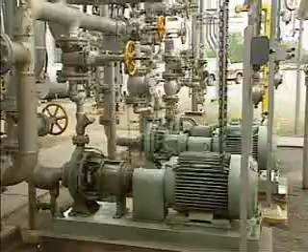Bearings are machine parts in which other parts turn or slide. They are found in almost every type of moving machinery. Since your job involves maintaining equipment that uses bearings, you need to know how bearings operate, how to recognize types of bearing failures, how to remove bearings, and how to install new bearings.

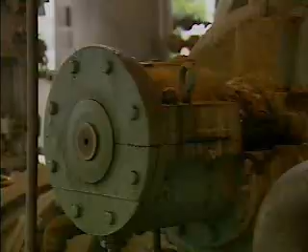The two general categories of bearings are rolling contact bearings and sliding surface bearings. This unit focuses on rolling contact bearings. Bearings are found in almost every type of moving machinery, and they perform three basic functions: carrying a load, reducing friction, and positioning moving machine parts.

The term load refers to the force or weight that is placed on a bearing. Different bearings are designed to withstand different types of loads. The type of load placed on a bearing is determined by the direction in which force is applied. This force can be either axial or radial. Let's look at an illustration to see what these terms mean.

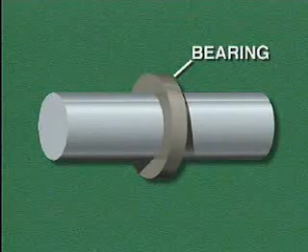Most bearings are mounted on rotating shafts. A shaft rotates around a center line or axis. The distance from the axis to the outside of the shaft is called the radius.

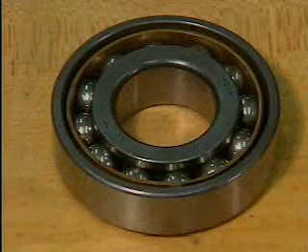While individual bearings may differ slightly, a typical rolling contact bearing consists of rolling elements, an inner ring, an outer ring, and a retainer. The rolling elements are either balls or rollers made of specially hardened steel. In this example, the rolling elements are balls, set between two hardened steel rings, an inner ring and an outer ring. These rings are often called races.

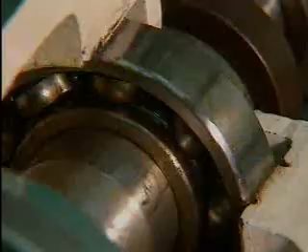In a typical installation, the outer ring is fixed and doesn't move. The inner ring is fitted to the shaft. As the shaft rotates, the inner ring also rotates. The rolling elements are held in position by the retainer, which you may hear referred to as a separator or a cage. The retainer positions the rolling elements evenly around the rings and ensures that the load is distributed equally on each rolling element when the shaft is turning.

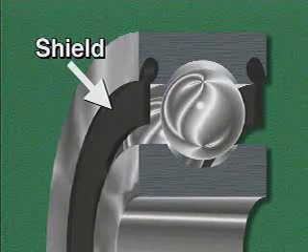In addition to these parts, some rolling contact bearings are equipped with devices that protect them from dirt and other contaminants. One type of protective device is a shield. A shield can prevent all except the very smallest contaminants from entering a bearing. The shield is usually attached to the ring that does not rotate.

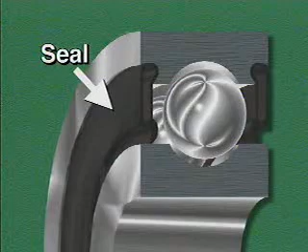Another type of protective device is a seal. A seal is similar to a shield, but it has a lip that rubs against the ring that rotates. Seals are used primarily on permanently lubricated bearings because they prevent the lubricant from leaking out of the bearing.

Rolling contact bearings can be divided into two categories based on the shape of their rolling elements: ball bearings and roller bearings. The various types of ball bearings differ primarily in the shapes of their inner and outer rings. Let's look at some common types of ball bearings.

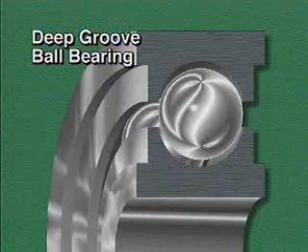A deep groove ball bearing is similar to a shallow groove ball bearing, except that the inside surfaces of the inner and outer rings are deep. Deep groove ball bearings are designed primarily for moderately heavy radial loads, but they can also handle a small amount of axial load. This type of bearing is also called a Conrad bearing.

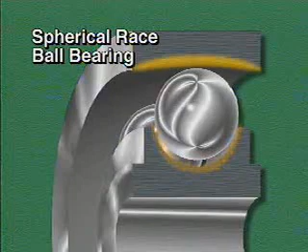This is a spherical race ball bearing. It has a deep groove in its inner ring, but the surface of its outer ring is shaped like part of a sphere. This type of bearing is designed primarily for radial loads, but it can carry some axial load. Spherical race ball bearings are called self-aligning bearings because they can adjust to some misalignment. Misalignment is a condition in which one ring of a bearing is out of line with the other ring. The shape of a spherical race ball bearing allows it to handle a small amount of misalignment.

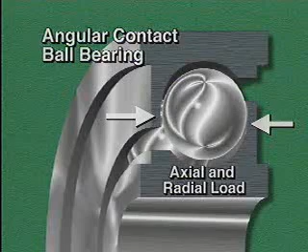Another type of ball bearing is an angular contact ball bearing. An angular contact ball bearing has a high shoulder on one side of the inner ring and a high shoulder on the opposite side of the outer ring. This design allows the bearing to handle both axial loads and radial loads. Angular contact bearings are often used in pairs so that they can support axial load in either direction. The surfaces that contact each other are specially machined to match. If one of the pair fails, both bearings must be replaced.

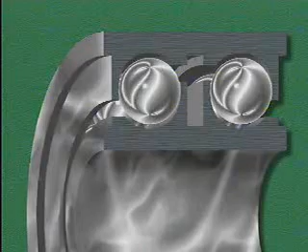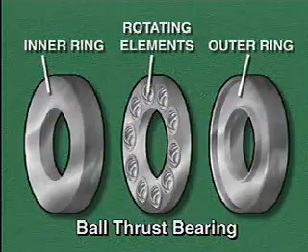The other basic category of rolling contact bearings is roller bearings. Roller bearings can carry more load than ball bearings because rollers are larger than balls, and they spread the load over a greater area. Let's look at some common types of roller bearings.

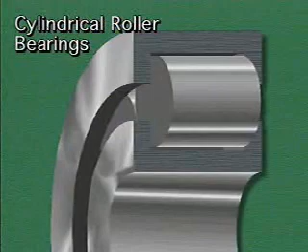Cylindrical roller bearings have rollers that are shaped like cylinders. These bearings are designed primarily to support heavy radial loads.

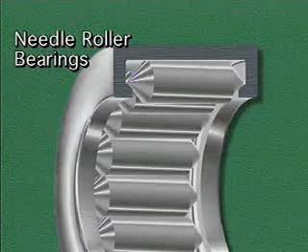Needle roller bearings are similar to cylindrical bearings, but the rollers are much thinner. Needle roller bearings can support a great deal of radial load because many of the thin rollers can be put into a bearing. They are often mounted without an inner ring or a retainer; instead, the rollers ride directly on the surface of the shaft. Because these bearings can be mounted without an inner ring, they are often mounted on shafts where space is limited.

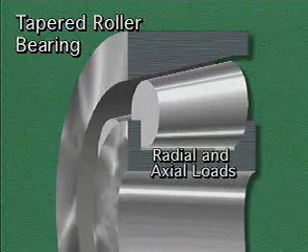Another type of roller bearing is a tapered roller bearing. In tapered roller bearings, the rollers are smaller at one end than at the other, and the rings are tapered to match the rollers. Tapered roller bearings can support both radial loads and axial loads.

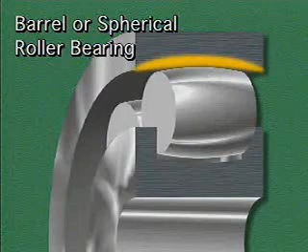Barrel or spherical roller bearings are self-aligning bearings. The outer ring is shaped like part of a sphere, which allows the bearing to align itself. Barrel roller bearings are designed to handle primarily radial loads, but they can also handle some axial loads.

Bearings are precision parts, and they must be installed as precisely as possible. How the bearing fits onto a shaft and the kind of mounting that is used are both important to the proper functioning of a bearing.

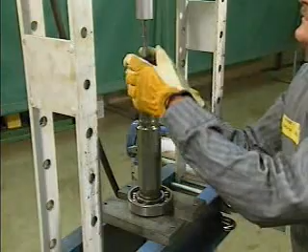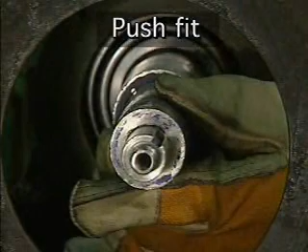The term fit refers to the tightness or looseness with which a bearing is installed onto a shaft. There are two kinds of fit: push fit and press fit. A push fit is a fairly loose fit; usually a ring that has a push fit can be pushed into place by hand. A press fit is much tighter; more effort is needed to press the ring into place. A press fit is also called an interference fit or a shrink fit.

Generally, rolling contact bearings have a press fit on the ring that rotates and a push fit on the ring that doesn't rotate. In most bearings, the inner ring is the ring that rotates. So let's take a look at some methods for mounting bearings whose inner ring rotates.

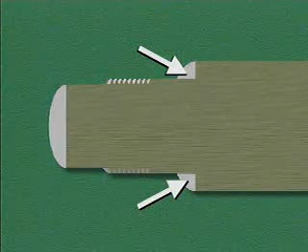One inner ring mounting method that's commonly used is lock washer lock nut mounting. In this method, a shoulder on the shaft is used to prevent the bearing from sliding in one direction. The shoulder is the place on the shaft where the shaft size changes so that a bearing can be placed against it. The bearing is installed with a press fit against the shoulder. A lock washer and a lock nut are used on the other side of the bearing to prevent the bearing from sliding in the opposite direction.

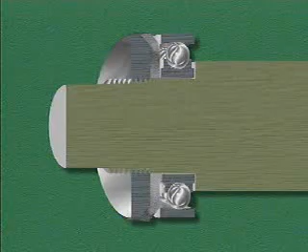The lock washer has a tab that fits into a slot in the shaft and prevents the lock washer from slipping around the shaft. Other tabs on the lock washer can be bent to fit into slots in the lock nut to prevent the nut from loosening.

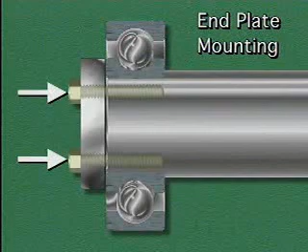Another method of mounting a bearing is called end plate mounting. This method is used when the bearing must be mounted on the end of a shaft. When end plate mounting is used, one side of the bearing is held in place by a shoulder on the shaft. The other side of the bearing is held in place by an end plate, which is secured by locking bolts that screw onto the end of the shaft.

Another method of inner ring mounting is called eccentric cam mounting. In this type of mounting, the bearing's inner ring is wider than usual. One end of the inner ring has a projection that is slightly off-center from the rest of the bearing; this projection is called an eccentric cam. A locking collar fits over the cam. The shapes of the cam and the locking collar cause the inner ring to be squeezed against the shaft when the locking collar is turned.

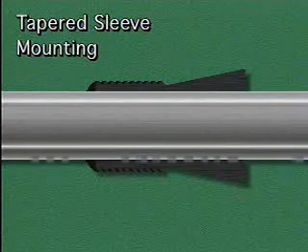Another type of inner ring mounting is tapered sleeve mounting. With this method, the inner ring of the bearing is not mounted directly on the shaft. Instead, a slightly tapered metal sleeve is placed on the shaft first, and then the bearing is slipped over the sleeve. The inner ring of the bearing must have a matching taper so that the ring will make full contact with the sleeve. The bearing and the sleeve are secured to the shaft with a lock nut and lock washer. As the lock nut is tightened, it drives the bearing up the tapered sleeve.

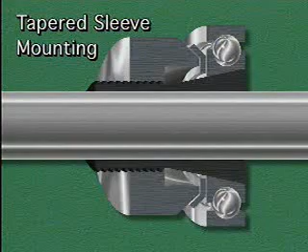This causes the sleeve to tighten down on the shaft.

The last type of mounting we'll look at is mounting a bearing without an inner ring. In this type of mounting, the outer ring and rolling elements slip over a specially hardened shaft. The rolling elements are in direct contact with the shaft, which acts as the inner ring of the bearing. This kind of mounting is often used when there is not much space around the shaft.

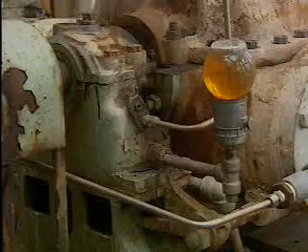Bearings are usually enclosed in housings. The housing is the part that surrounds a bearing and holds it in place. In order to support the bearing, the housing must be able to handle the types of load that the bearing is subjected to. The load is usually transferred from the shaft to the bearing to the housing. Most housings contain lubricant for the bearing, and they also prevent dirt and other contaminants from getting into the bearing.

Bearing housings are divided into two types: pillow block housings and built-in housings. Pillow block housings are located outside the machine casing and are separate from it. In some cases, the pillow block housing holds the end of the shaft. In others, the shaft passes through the housing. Pillow block housings can be either solid or split, and they come apart in different ways.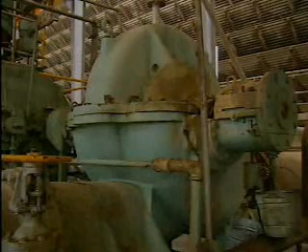Some solid pillow block housings have a removable cover. Once the cover is removed, the housing can be moved out of the way and the bearing can be taken off the shaft. With a split pillow block housing, the top of the housing can be taken off. The shaft can then be lifted out so that the bearing can be removed.

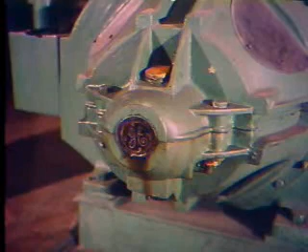A built-in housing is actually part of the machine casing. In many cases, the shaft and the bearing are completely contained within the machine. To reach them, the casing must be taken apart.

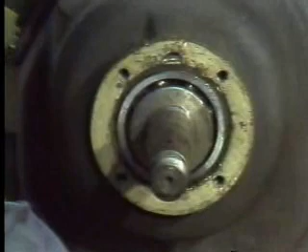Built-in housings may also be solid or split. The solid types of built-in housings usually have removable end caps. Removing the end caps allows the bearing and the shaft to be taken out of the machine so that the bearing can be worked on.

With a split-type built-in housing, there is a joint in the machine's casing that must be taken apart to get to the bearing. This allows the shaft and the bearing to be lifted out so that the bearing can be worked on. Bearing housings can be built either to allow a small amount of axial movement or to completely prevent axial movement.

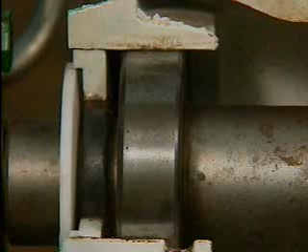A housing that allows a small amount of axial movement is said to have a floating bearing. A housing that prevents all axial movement is said to have a fixed bearing. Both types of housings may be in the same machine.

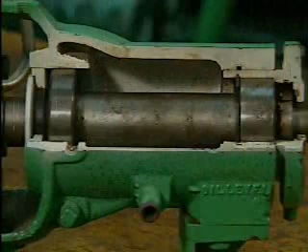A shaft usually has several bearings spaced along its length. As a rule, only one of these is a fixed bearing. The others are usually floating bearings.

All bearings need to be lubricated in order to reduce the amount of friction and wear that occurs during normal operation. Rolling contact bearings are usually lubricated with either oil or grease, and that's what we'll be focusing on during this part of the lesson. As we do, keep in mind that some bearings are permanently sealed and do not need additional lubrication. Your plant's maintenance procedures should specify which bearings require additional lubrication.

We'll begin with lubrication methods that use oil. Generally, oil is used to lubricate bearings installed in machines that operate at a high speed under a light load. There are several different ways to provide oil to rolling contact bearings, including forced circulation, constant level oilers, oil baths, splash feed methods, and drip feed methods.

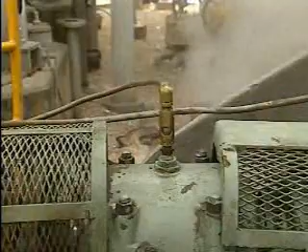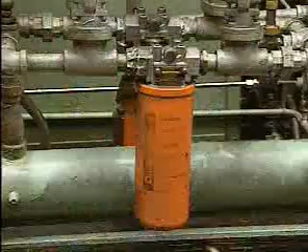A forced circulation system is a common method for lubricating rolling contact bearings with oil. In this system, a pump supplies a steady supply of oil to the bearing. The pump sits on top of a rectangular reservoir called a sump. After leaving the bearing, the oil collects in a reservoir so that it can be pumped again. Oil filters in the system remove dirt and contaminants from the circulating oil. Coolers are also used to remove heat that the oil picks up from the bearing.

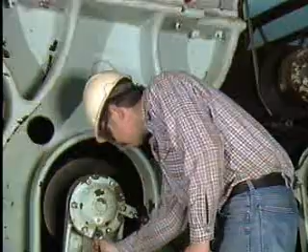Another way to lubricate bearings is with grease. Grease is generally used to lubricate bearings that are installed in machines that operate at slow speeds under heavy load, such as large circulating pumps. When adding grease to a bearing, it's important to use a grease that is compatible with the grease that is already in the bearing.

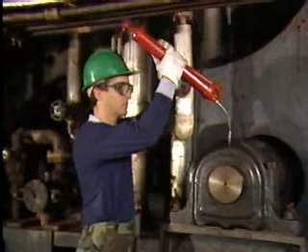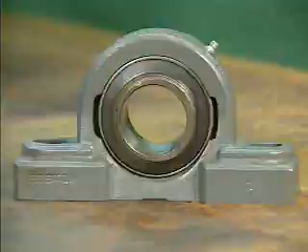Mechanics generally use one of three basic methods for greasing a bearing. They can grease the bearing with a grease gun, pack the bearing by hand, or use a grease cup. These methods are used only with bearings that are not sealed. Sealed bearings are permanently lubricated and they do not have to be greased. Many bearings that have to be greased are contained in housings that have grease fittings. A grease fitting is a small rounded projection on the housing that has a hole in it.

To grease the bearing, a grease gun with a matching fitting is attached to the fitting on the housing. When this method is used, it is often necessary to remove the housing drain plug to allow old grease or excess grease to drain out as new grease is pumped in.

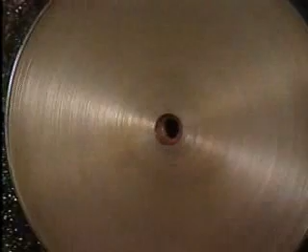Grease should be applied to the bearing while it is in motion to ensure that the grease will be evenly distributed. If the housing doesn't have a drain plug, the excess or old grease leaves the bearing through the shaft seals. In this case, it is very important to add grease slowly so the shaft seals are not damaged. A good rule of thumb is to pump the grease gun no more than 2 or 3 times, unless specific plant guidelines state otherwise.

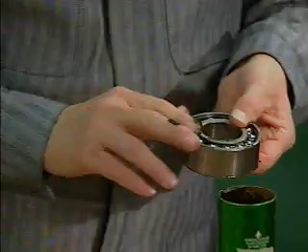When you're installing a bearing, you may have to hand pack it with grease. To do this, hold the bearing in your hand while you press grease in between the rolling elements. Make sure the grease is distributed evenly throughout the bearing. Pack the bearing 1/3 to 1/2 full of grease. If too much grease is added, rotate the bearing slowly to force out the excess.

Another way to lubricate a bearing with grease is to use a grease cup. A grease cup is a threaded container with grease in it that is mounted on the bearing housing. The top of the cup is turned to force the grease into the bearing.

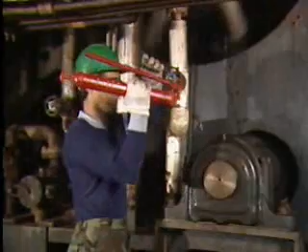In this topic, we looked at the functions and features of rolling contact bearings and at some common types of rolling contact bearings. We also looked at different mountings and housings for bearings and saw how bearings can be lubricated. Now try some practice questions.

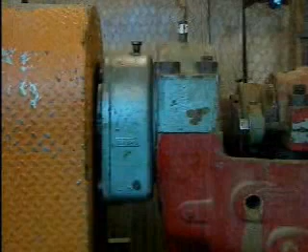Rolling contact bearings can last for years, but eventually all bearings fail. There are several factors that can cause bearings to fail and several specific types of bearing failures. Usually, it's possible to tell a bearing is failing before removing it from the machine. Bearing failures are often accompanied by high levels of noise or vibration, high operating temperatures, and the smell of burnt oil.

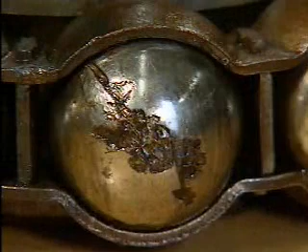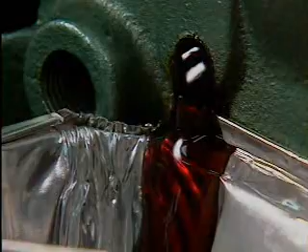After a failed bearing has been removed and taken apart, other evidence of failure may be seen. This evidence may include burn marks, which are blue or brown marks on the rolling elements or the rings; spalled areas, which are places where the surface of the metal has flaked away; a bent or broken retainer; cracks in the rings; and discolored lubricant. If the bearing failure is unusually severe, all of these signs could be present, but not all of the signs are necessarily present with each type of failure.

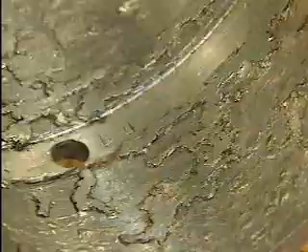Let's look at some common types of rolling contact bearing failures. One type is fatigue failure. Fatigue failure happens to every bearing eventually. It occurs because the bearing has worn out. Symptoms of fatigue failure may include loud noise and vibration, high operating temperature, burn marks, spalled areas, a bent or broken retainer, or cracks in the bearing metal.

Fatigue failure is caused by metal fatigue. When a bearing is in operation, it is continually flexing or bending. Although the amount that a bearing bends is very small, it is significant because it is continuous. There is a limit to the amount of bending and flexing the bearing metal can tolerate. After the metal has reached its limit, the bearing fails.

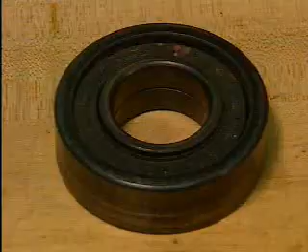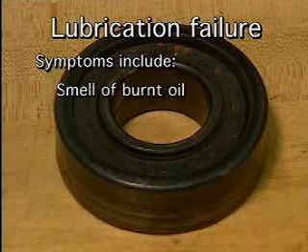Another type of bearing failure is lubrication failure. This occurs when the oil or grease in a bearing fails to function correctly and the bearing overheats. Symptoms include the smell of burnt oil, discolored lubricant, and burn marks on the rings or rolling elements. Lubrication failure can also be caused by improper lubrication, meaning too much or too little lubricant, using the wrong kind of lubricant, mixing incompatible lubricants, or using contaminated lubricant.

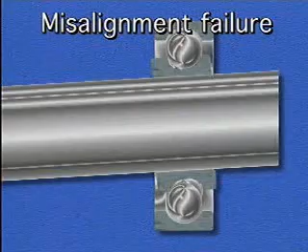Misalignment failure is a type of failure that occurs when one ring of a bearing is out of line with the other. The primary sign of misalignment failure is unusual wear marks on the inside of the rings. A normal wear pattern follows the center of the ring.

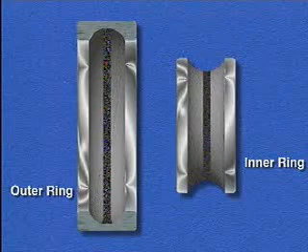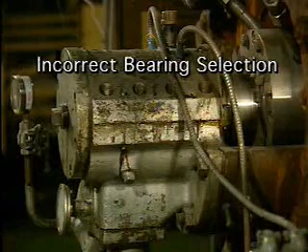Thrust failure occurs when there is more axial load on a bearing than it can handle. The signs of thrust failure include cracked rings, a bent or broken retainer, and loose rolling elements. Thrust failure can occur for a number of reasons, including incorrect bearing selection, improper installation, and excessive installation force.

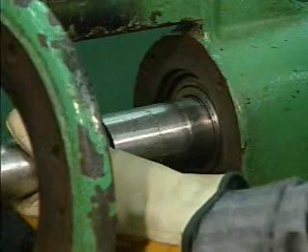Rolling contact bearings are usually installed with a press fit on one ring and a push fit on the other. Removing a bearing installed with a push fit is relatively simple because it is a loose fit. Removing a bearing installed on a shaft with a press fit is more difficult because it is a tight fit. The principles involved in removing a press-fit bearing are the same, whether it is the outer ring or the inner ring that has the press fit.

In this part, we'll look at two methods for removing the press fit inner ring of a bearing from a shaft. The first method is used when the shaft can be removed from the machine.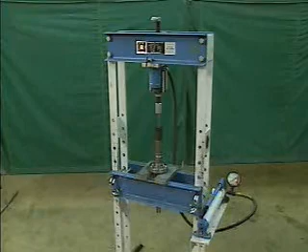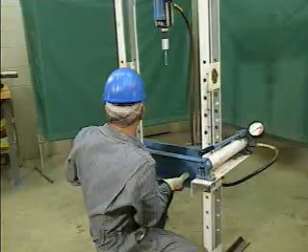This method uses a device called a hydraulic press. A hydraulic press is a machine frequently used to apply pressure to parts of equipment being assembled or disassembled. It removes a bearing from a shaft by holding the bearing in place and pushing the shaft through it. Let's watch a mechanic use a hydraulic press to remove a bearing from a shaft.

To begin setting up the hydraulic press, the mechanic first adjusts the height of the bed. Then he places table plates on the bed. Next, he sets up the shaft in the bed, lining it up so that the table plates are supporting only the bearing's inner ring. This is important because if too much stress is placed on the outer ring, the bearing could be damaged. He also checks to ensure that the ram is positioned directly above the shaft.

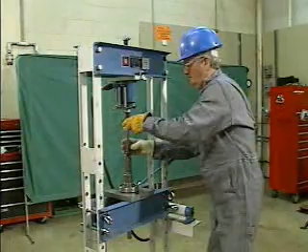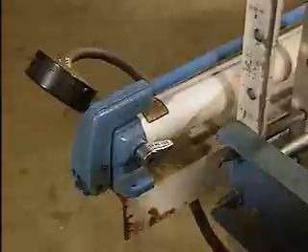Next, the mechanic inserts the shaft protector between the shaft and the ram. After the shaft and bearing have been lined up, he closes the pressure release valve on the hydraulic pump, then pumps the handle to begin applying force to the press.

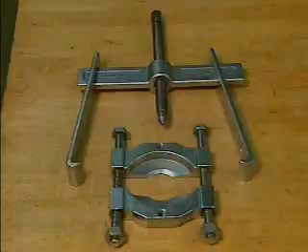As the shaft starts to move through the bearing, he watches the bearing to make sure it does not jump off its supports and is not cocked. If the bearing is cocked, it will jam on the shaft. As the shaft is forced straight down through the bearing, the mechanic holds onto it with one hand to prevent it from dropping. The second method we will look at to remove a bearing uses a bearing puller.

A bearing puller is a portable device, generally used to remove a bearing from a shaft when the shaft can't be removed from the machine. Before using the bearing puller, the mechanic applies penetrating oil between the shaft and the bearing. This oil makes it easier to remove the bearing.

Then he sets up the bearing puller jaws behind the bearing so that they rest loosely against the shaft. Next, the mechanic hooks the side rods behind the jaws, then makes certain that both rods are aligned correctly on the strong back. In this example, he places the lead screw into an alignment hole in the shaft, then tightens the lead screw.

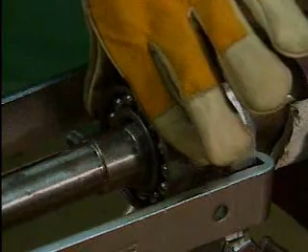He checks the position of the jaws to make sure that they will only push against the inner ring. A good way to check the jaw position is to tighten the puller and then turn the bearing's outer ring. If the outer race can move freely, then the jaws are positioned correctly.

Next, the mechanic uses a wrench to tighten the lead screw and draw the bearing off the shaft. He is careful not to cock the bearing. If it is cocked as it comes off the shaft, it will jam and the puller will have to be readjusted. The mechanic continues pulling until the bearing is loose enough to be removed by hand.

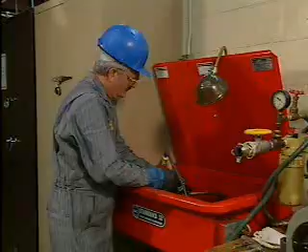After the failed bearing has been removed from a shaft, the mechanic cleans it with an approved solvent to remove grease and dirt. Then, after it has dried, he inspects the rings and rolling elements, turning the bearing slowly to determine whether there is any stiffness or binding. He also checks for signs of failure such as spalling, burn marks, cracks, dents, and pits.

In this topic, we looked at some causes of rolling contact bearing failures, and we looked at specific types of failures and signs that accompany each type. We also looked at two ways to remove failed bearings. To test your understanding of what we've covered, try answering some practice questions.

Bearings that fail must be replaced. In this part, we'll watch a mechanic prepare to install a new rolling contact bearing.

The mechanic begins by carefully removing and cleaning the damaged bearing. After a bearing has been removed from a shaft, it should be handled carefully. It should not be left where it will get dirtier, and it should not be rotated, banged around, or dropped. Handling the bearing carelessly will only make the task of determining why it failed more difficult.

In order to properly inspect the bearing, the mechanic must first clean it. In this example, he cleans the bearing with an approved solvent to remove grease and dirt. Then, after it has dried, he examines the bearing for signs of failure, turning it slowly to determine whether there is any stiffness or binding when the rolling elements turn.

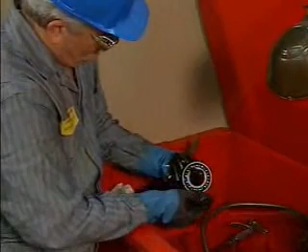He also checks for signs of failure such as spalling, burn marks, cracks, dents, and pits. If the bearing has been damaged due to misalignment failure, lubrication failure, or thrust failure, the problems that caused the failure must be corrected. In this example, the bearing has simply worn out.

The mechanic then selects the correct type of replacement bearing according to the manufacturer's specifications. He checks to make sure that the part number of the bearing specified by the manufacturer is the same as the part number on the replacement bearing.

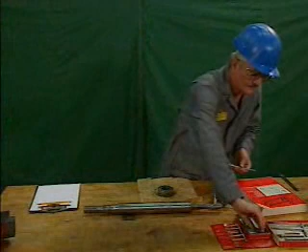In this example, the mechanic's next step is to pack the new bearing with grease. Before installing the bearing, the mechanic measures the diameter of the shaft and the diameter of the inner ring with a micrometer to make sure that all the parts will fit together correctly. When all of these preparations have been completed, the replacement bearing can be installed.

New bearings must be installed correctly in order to work properly. In this part, we'll look at two common methods of installing rolling contact bearings. One method uses a hydraulic press, and the other method uses a tubular drift.

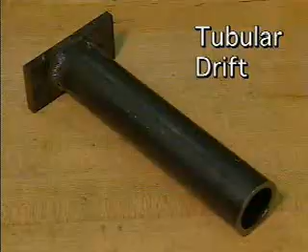We'll start with the tubular drift method. A tubular drift resembles an ordinary length of pipe. The drift should be made of a soft metal to prevent damage to the bearing or the shaft.

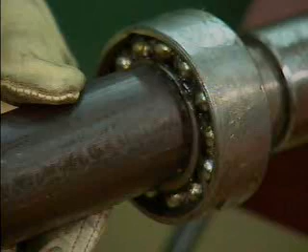The inside diameter of the drift must be slightly greater than the inside diameter of the inner ring of the bearing that is being installed. If the drift and the inner ring were exactly the same size, the drift would jam on the shaft.

The outside diameter of the drift must never be so large that it touches the rolling elements or the outer ring, because a drift that large could damage the bearing.

When a tubular drift is used, the shaft stays stationary and the bearing is forced down the shaft. This method is generally used when the shaft can be removed from the machine and placed in a vise. If the shaft is left in the machine, its other bearings may become Brinelled.

The tubular drift method is both simple and efficient. Let's watch a mechanic install a bearing using a tubular drift.

First, the mechanic secures the shaft in a vise. He then lubricates the part of the shaft that the bearing will slide over. This will make it easier for the bearing to slide onto the shaft.

Next, the mechanic pushes the bearing onto the shaft by hand as far as it will go. He then places the drift over the shaft, checking to make sure that it does not touch the rolling elements or the outer ring. Then the mechanic uses a mallet to pound the drift against the bearing until it is in the correct position.

When the inner ring of the bearing is flush against the shaft, the mechanic installs a lock washer and a lock nut.

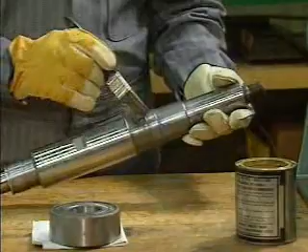Next, the mechanic lubricates the shaft. The shaft is lubricated before it is placed in the bearing so that it will slide into the bearing more easily. Then he places the shaft in the bearing.

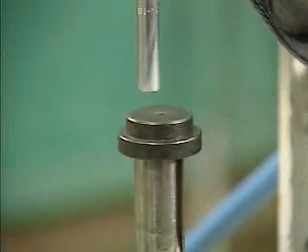The mechanic checks to make sure that the shaft is lined up directly under the ram. Then he places the shaft protector on the shaft and partially lowers the ram into position. Before operating the press, the mechanic checks the whole assembly again to be certain that everything is lined up properly.

The mechanic then operates the press. He watches the shaft carefully to make sure that it moves smoothly into the bearing.

If the shaft does not move smoothly into the bearing, the mechanic must stop the press because the bearing might be jammed. If this happens, the mechanic must correct the problem and then recheck the alignment of the bearing, the shaft, and the ram. He can then restart the press.

After the bearing is on the shaft in the correct position, the mechanic stops the press and inspects the bearing. He checks to make sure that the entire surface of the inner ring is touching the shaft all the way around. The mechanic then removes the bearing and the shaft from the press.

In this topic, we saw how to prepare for installing a new rolling contact bearing, and we looked at some installation methods. To test your understanding of what we've covered, try answering some practice questions.